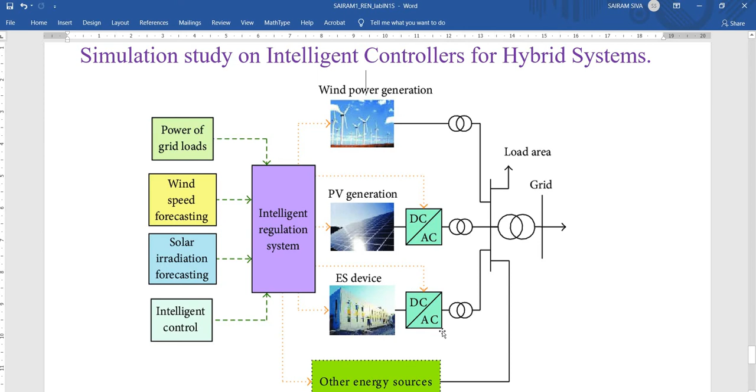The PV power generation is available. Based on the irradiation variation, the DC output can be varied depending upon our requirement. So this is the thing we are going to see. Now we are going to see our simulation file. So this is the simulation file.

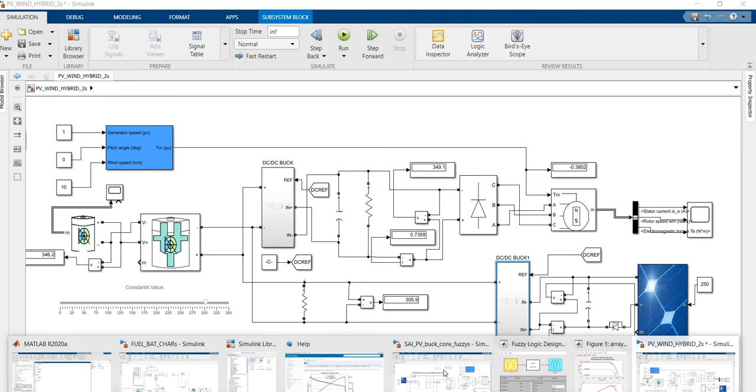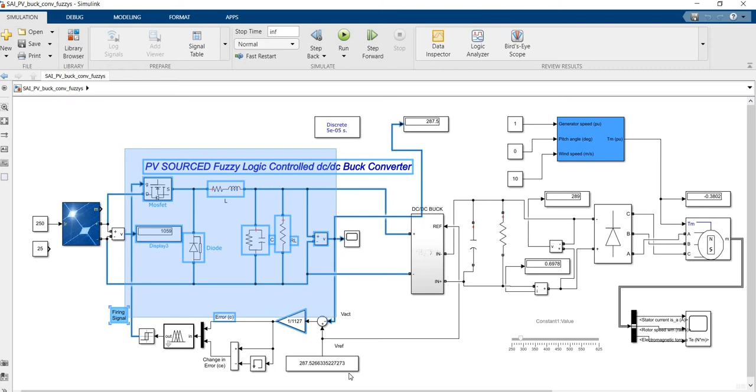Here DC to DC converters are used, and since it is an intelligent based system, here we are going to see the PV sourced fuzzy logic controlled DC to DC buck converter which is available here. This is the fuzzy logic based DC to DC converter.

This is connected to the PV source, and another one is the PMSG, permanent magnet synchronous generator, which is driven by the wind turbine. Okay, that is the wind turbine. This is negative, which means it acts as a generator. If the torque is positive, the machine will act as a motor. Now the machine acts as a generator.

So this is one source, PV. This is another source, the wind driven permanent magnet synchronous generator. The two sources will be connected through the DC to DC converter. So this is one DC to DC converter, fuzzy logic based control.

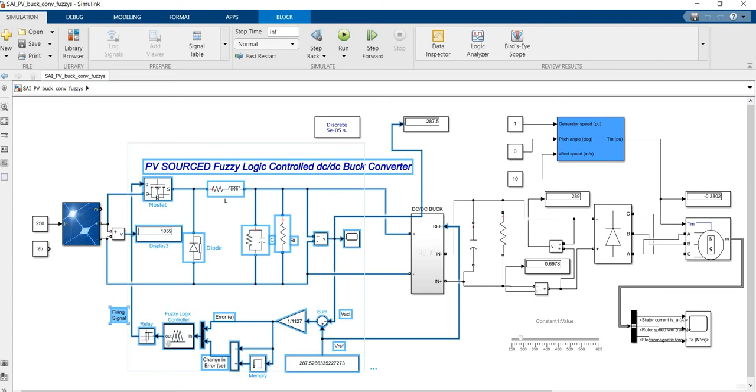Here is the normal conventional DC to DC converter, the same DC to DC converter, but this DC to DC converter is controlled by the PID controller. So this is controlled by the PID controller. The normal thing we apply here is the PID controller.

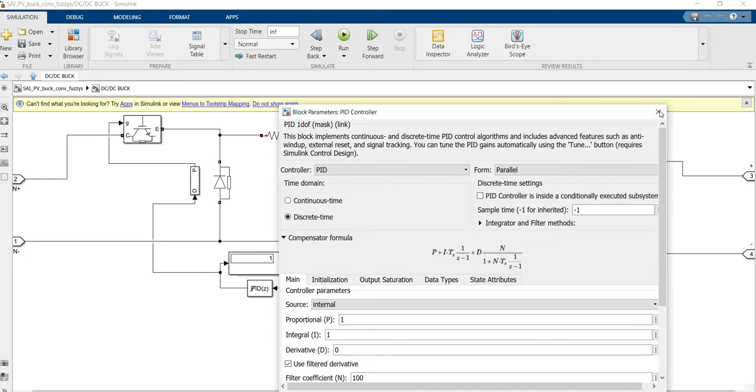Next, in this entire control, the PID controller is replaced by the fuzzy logic control. Before entering the simulation, the reader can get knowledge of basic fuzzy logic operation. This is the PV panel. The output of the PV panel is connected to the basic DC to DC buck converter.

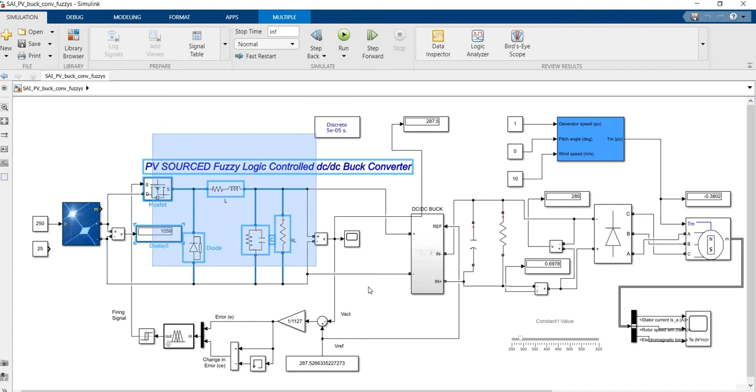In this DC to DC buck converter, the power electronic switch MOSFET is connected here, and this MOSFET switching gate is connected to the output of the fuzzy logic controller. This fuzzy logic controller has a separate fuzzy file, that is FC buck. This simple buck converter simulation is at a preliminary level, UG student scale.

So for that purpose, this is the fuzzy logic file which is available here. We have already trained and obtained the rules, everything. So this is the thing we are going to see. Fuzzy import from the workspace. So that is the workspace which is available.

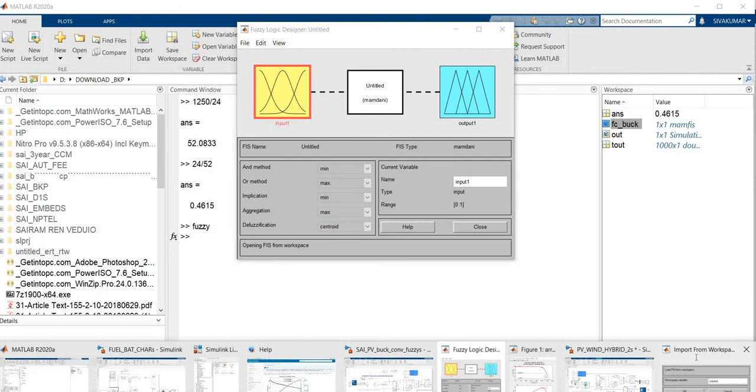Here we are going to see the name, that is fc_buck. I am going to copy this structure, copy fc_buck. Again I am going to put this name here, fc_buck, then OK. Now the file is open.

What is the input? One input is error, another one is the change in error. The error is defined in different sets: positive big, negative big, positive medium, negative medium, positive small, negative small, and zero.

Similarly, the change in error is also segregated into different values: positive big, negative big, negative medium, positive small, negative small, and zero. So these are all the things.

The output value is -1 to +1. The input values are also -1 to +1. Most probably, the input range is the same as the output range you fixed, and the system can be fine tuned.

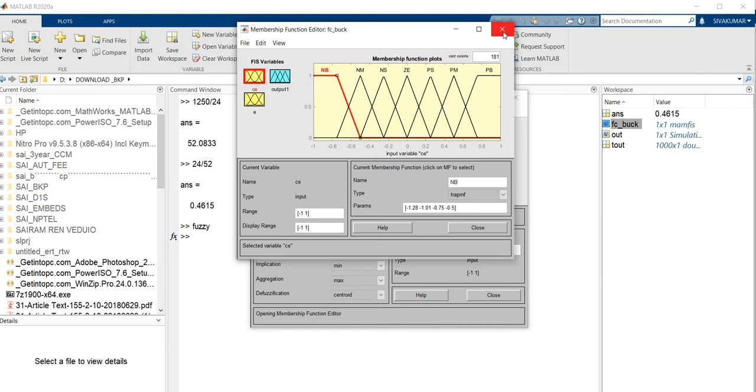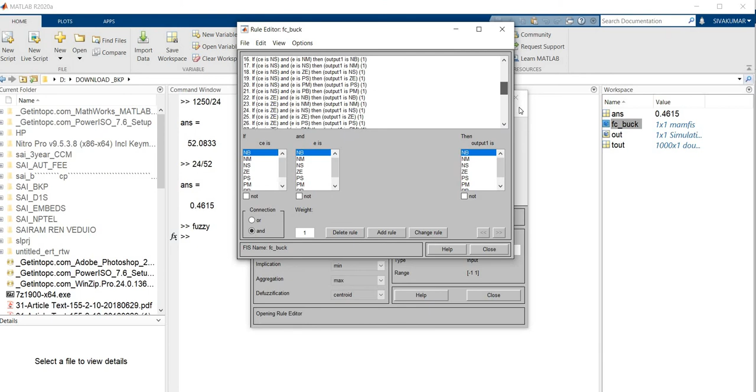Okay, so if you want to see the system rules and other things, I am also going to double click. These are all the rules written in the fuzzy logic control.

If you want to add a rule, this is the rule which may be added. Otherwise, if it is delete, then delete the rule and/or operation which is available. So this is the thing which is available in the fuzzy logic.

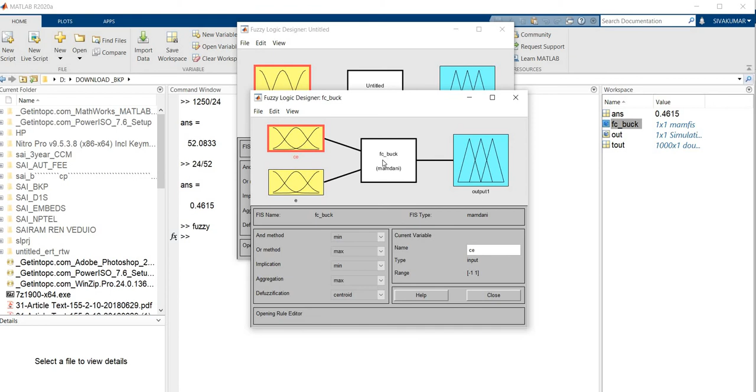The procedure is, first you have to drag and drop the fuzzy logic block which is available in the library. So where is it available?

I type FUZZY and enter. This is the fuzzy logic controller with the rule viewer, fuzzy logic normal controller. So this is the fuzzy logic controller. You may double click, and the same operations we are going to drag and drop.

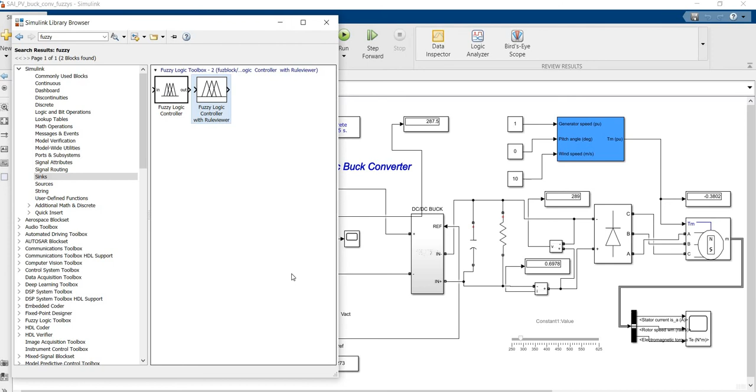So this is the rule viewer, this is the fuzzy rule viewer which is available in MATLAB. I am also going to drag and drop this fuzzy logic.

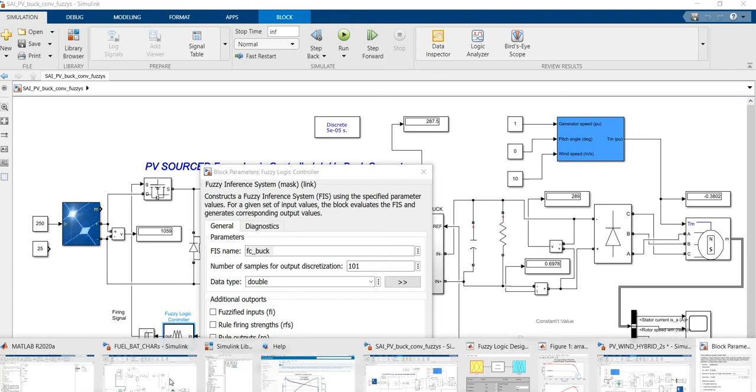Again, I am going to train. After training, I am going to export to workspace, and I give the same file name. The file name given is fc_buck, which is the same name, case sensitive, as available here. If the name changes in case sensitivity, the system will show an error.

Now this is the overall view of the hybrid system using the intelligent control. This is the intelligent buck converter control. Now I am going to simulate.

Please see, the input of the radiation is 250, which I am giving, and here that is 10 meters per second for the wind speed. So here, what is the output voltage in the PV? Here is the output voltage from the PMSG after converting into DC. Here we are going to see the DC to DC link voltage, which we regulate using this fuzzy logic controller.

So this is the slider gain. I am going to click. This can be enabled, so these are all enabled. Whenever I change this slider gain, the output values are also controlled.

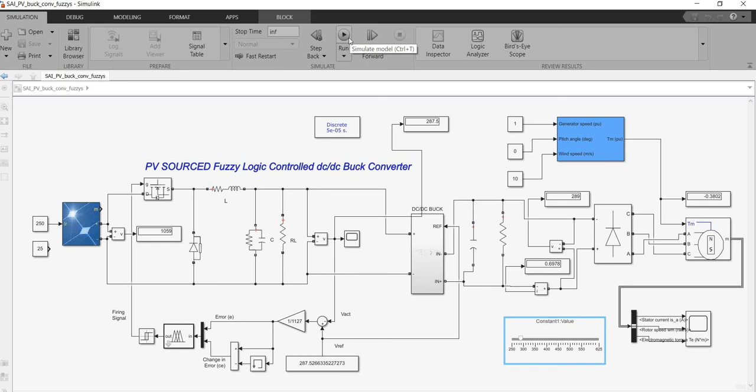Now we are going to simulate. I am going to press start the simulation. Now it may go to compile, yes, now it will start to run. What is the value here?

287.5, that is 287 point something, 0.1 is the difference there. Now I simply increase the value, so that is 299 here. This I am also fixing at 350. What is it, 352? Same, 352.

What is the voltage available here? We are going to change this condition. That is 318 which is available here, but at the same time the voltage is 1197, that is 319, the same voltage which is available here.

Now I am going to improve the irradiation level to 750. So now it changes to 750. The voltage is 1255, not 1200, but 318 is maintained. Here also, whatever voltage we maintained, the same voltage level is kept.

Suppose I reduce the voltage to 290, same thing, 290 is reduced. If I increase to the maximum value, the same maximum value 393, these values we are able to control.